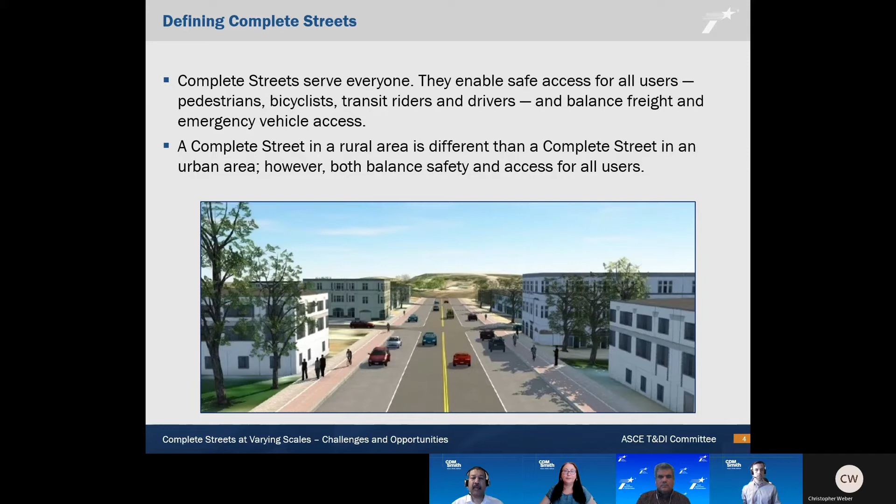Thank you, Ram. The Texas Department of Transportation, or TxDOT, is the transportation agency for the state of Texas. Headquartered in the state capital of Austin and with over 10,000 employees, the department is responsible for the planning, construction, maintenance, and operation of a multimodal transportation system.

Our state highway system has over 80,000 centerline miles, with a significant majority of those miles outside of cities. We have 25 district offices with oversight of 254 counties across Texas. Our mission: connecting you with Texas.

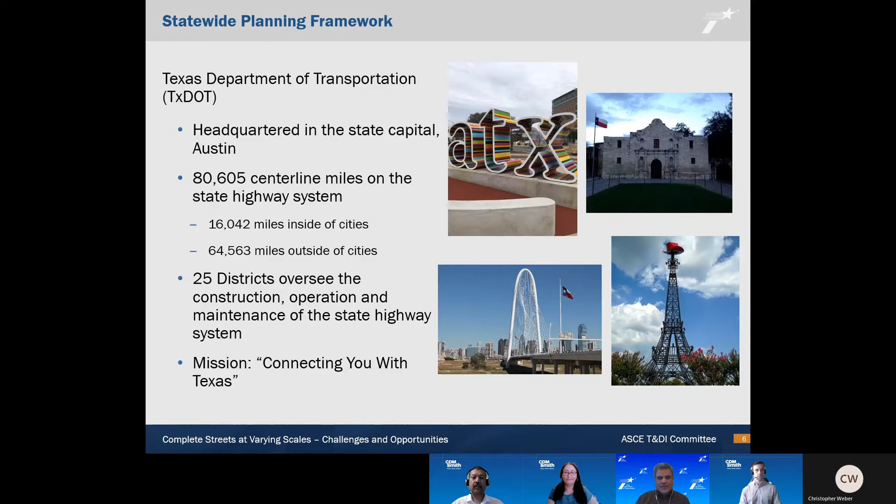Our bicycle and pedestrian program is located within our public transportation division and includes a manager and a planner. Each TxDOT district office also has a designated bicycle and pedestrian coordinator. In addition to TxDOT staff, the department has a bicycle and pedestrian advisory committee. It is comprised of 11 members appointed by the Texas Transportation Commission who serve voluntarily for a 3-year term. The advisory committee meets on a quarterly basis, with the next meeting planned for this summer in July.

The TxDOT Roadway Design Manual was developed by TxDOT to provide guidance in the geometric design of roadway facilities. The document is a guide containing geometric design recommendations and does not represent an absolute design requirement. Last summer, TxDOT issued a revision to the manual. The criteria contained in the manual are applicable to all classes of highways, from freeways to 2-lane roads. This roadway design manual represents a synthesis of current information and design practices related to highway design.

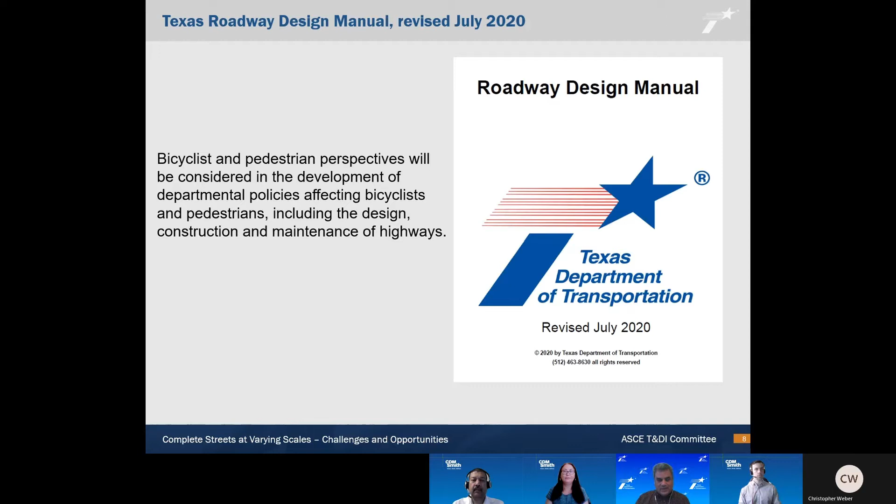Bicycle accommodations: the roadway design manual includes guidelines and standards for developing facilities to accommodate bicyclists. Such facilities are to be considered during the scoping process of a project and are a requirement for urban streets.

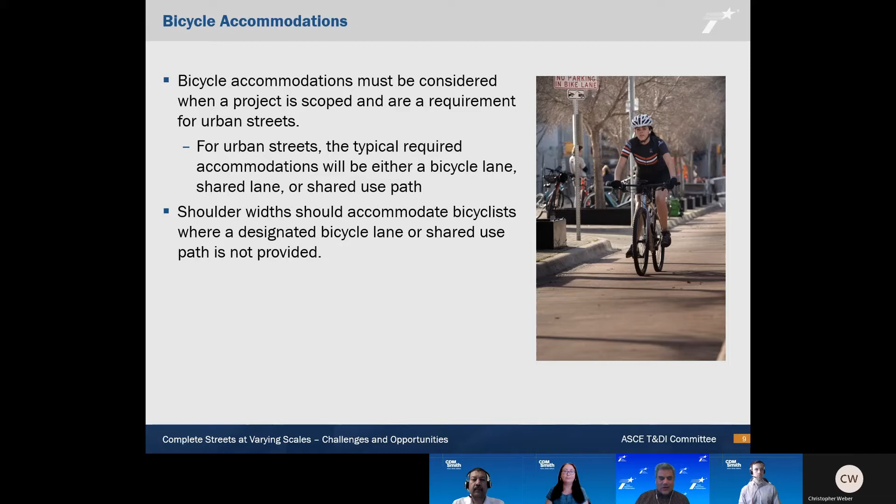The roadway design manual also includes guidelines and standards to accommodate pedestrians. Walking is an important transportation mode that needs to be incorporated into transportation planning and projects. Planning for pedestrian facilities should occur early and continuously throughout project development.

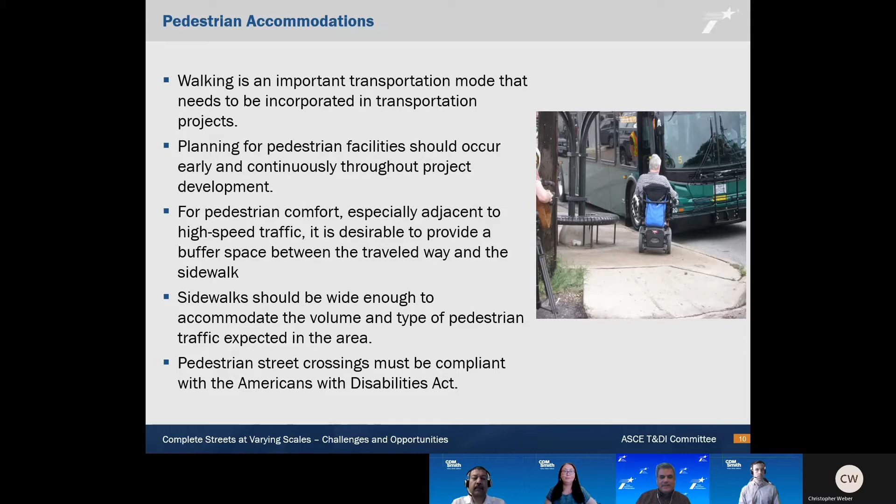Multimodal networks attract tourists, connect people to parks and other destinations, and create unique economic development opportunities in cities and towns across the state. In 2018, TxDOT completed the Bicycle Tourism Trail Study.

From that study, some recommendations were made related to being included on the bicycle tourism network, including: paved shoulders should be at least 8 feet wide and be provided on both sides of the roadway; drainage grates and gutter seams should not be included in the usable width unless they are bicycle friendly; and installing bicycle route signage to guide cyclists.

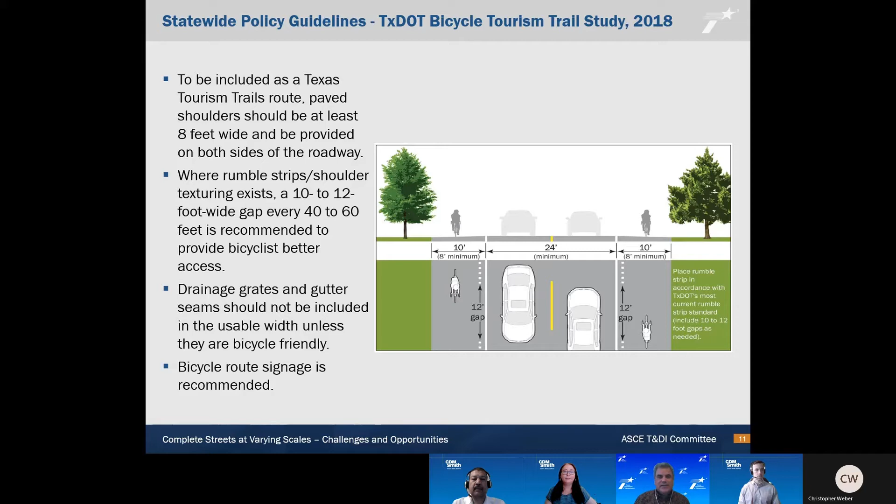Last year, TxDOT's Transportation Planning and Programming Division completed its most recent statewide transportation plan, Texas Transportation Plan 2050. The plan recognizes that active transportation, including walking and biking, encourages physical activity, which has been linked to a reduction in the risk of chronic disease and healthcare costs, and improving overall human health and quality of life.

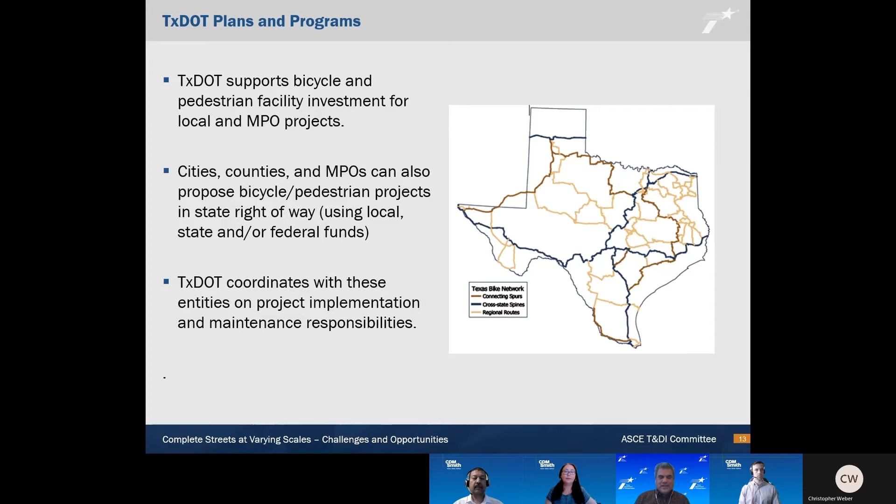TxDOT plans and programs: as noted in the Texas Transportation Plan 2050, TxDOT supports bicycle and pedestrian facility investment for local and metropolitan planning organization projects. Cities, counties, and MPOs can also propose bicycle and pedestrian projects in state right-of-way using local, state, and/or federal funds. TxDOT coordinates with these entities on project implementation and maintenance responsibilities.

TxDOT uses 3 federal funding sources for bicycle and pedestrian improvements: the Transportation Alternatives Program, Americans with Disabilities Act funding, and the Highway Safety Improvement Program. These programs are managed by the main TxDOT office headquartered in Austin in partnership with the 25 local district offices and regional and local governments.

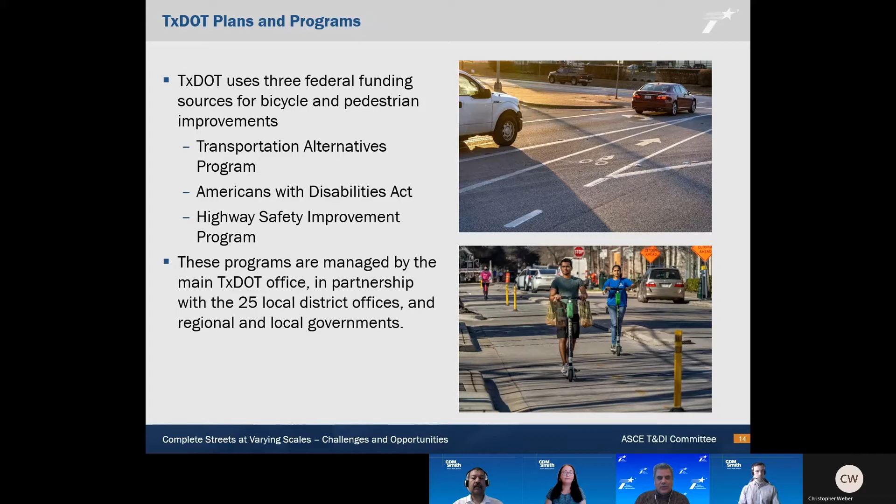Pedestrian and bicyclist traffic fatalities have been rising along with statewide vehicle miles traveled. November 7th, 2000 is the last time there was a deathless day on Texas roads. We want to end the streak of deaths on our roads. Our goal is to reduce the number of fatalities on our roads to zero by the year 2050. Continued investment in safe infrastructure also helps decrease motor vehicle related bicycle and pedestrian injuries and fatalities as we look to end the streak.

Thank you, Steve. So Steve provided an overview on the policies and programs at the statewide level. From that, we are going to delve a little bit more into a case study using US 67 in Texas as an implementation example. It is my pleasure to welcome and introduce Chris Weber, Alpine Area Engineer from TxDOT El Paso District. Chris?

Thank you, Ram. As Ram stated, we've recently completed a multi-year public engagement and planning effort on the US 67 corridor, which extends from the international border of Presidio, Texas and Ojinaga, Mexico, 142 miles all the way up to Interstate 10 near Fort Stockton.

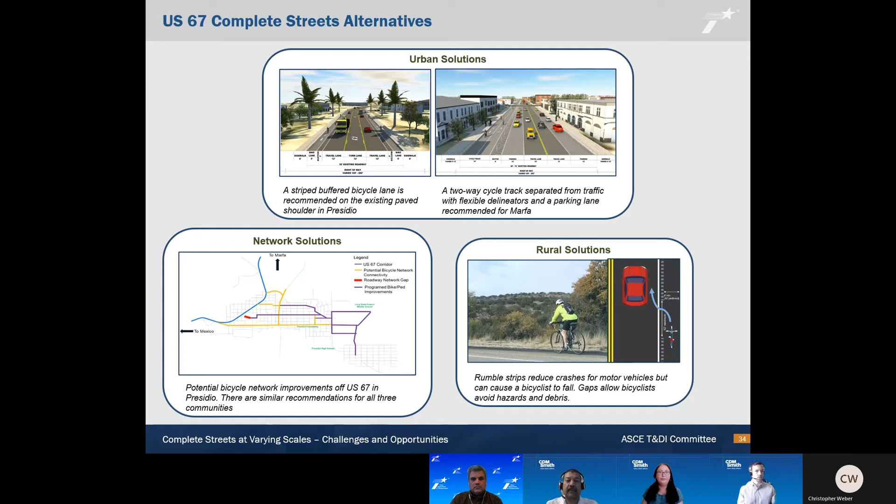So in taking all this information we collected from the public, our data analysis, and best practices from across the country, we developed a toolkit of different complete street solutions for the US 67 Corridor Master Plan. This toolkit essentially breaks down into urban solutions, rural solutions, and network solutions. I'll take you through a couple examples more closely in the next couple slides.

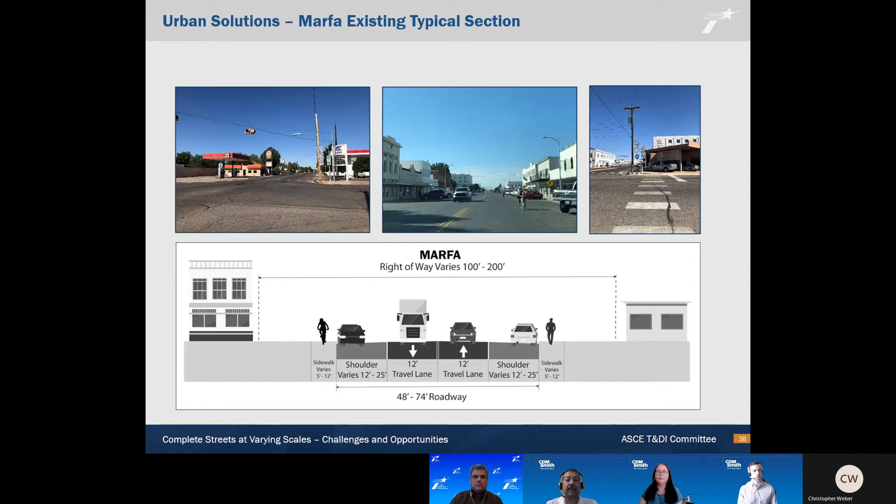As an example of one of our recommended urban solutions, I'll show you the city of Marfa, and this is the existing corridor. Residents in Marfa especially expressed a desire for bicycle and pedestrian facilities throughout the public outreach process. The city currently lacks bicycle lanes, but does have a local bike share called Bike Marfa. There's also significant tourism, especially present in Marfa for art attractions, and pedestrians and cyclists are a common sight on the roads going between the different attractions. As shown on screen, the right-of-way is pretty wide, with a lot of space to potentially work with for enhancements to accommodate bicycle riders and pedestrians.

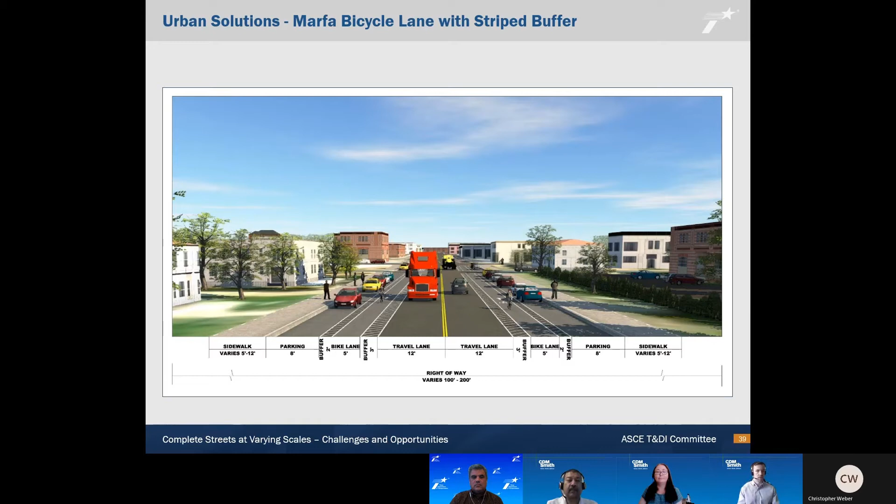On screen here is one of our proposed urban solutions for Marfa from our toolkit. Working within the wide right-of-way, the solution includes a bicycle lane with striped buffers, a parking lane, and a sidewalk. This next slide shows a plan view of the same solution. As US 67 is a corridor that carries a high volume of freight vehicles, this view shows the separation and mixing of the modes at this key intersection. As you can see, we have the sidewalks, the bicycle lanes with the buffers, and the striping for the vehicles and freight vehicles.

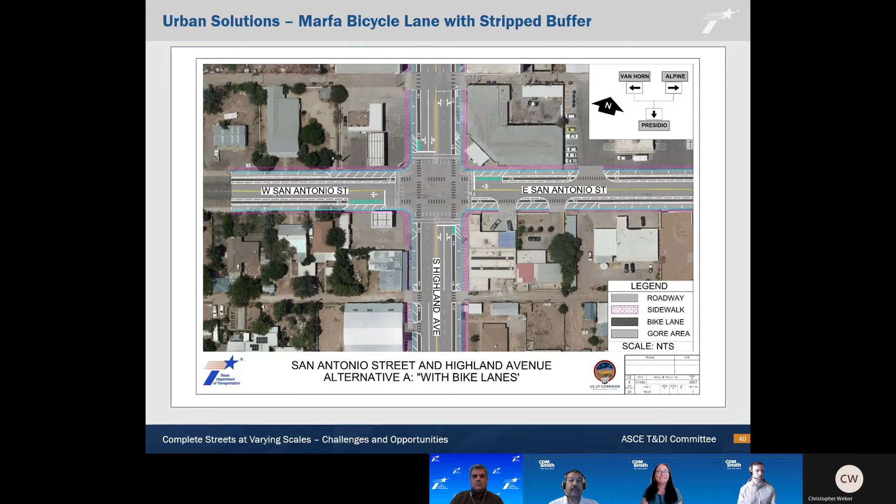To develop network solutions, we wanted to understand where current demand for bicycle and pedestrian amenities existed. So without having bicycle counts for these communities, we turned to Strava. Strava data is crowdsourced data collected from users of the Strava smartphone app. Users can utilize the app to track cycle trips, walks, and even jogs. Strava data is a useful tool for us to help identify when bicycle trips are occurring or demanded, but where that safe infrastructure might be lacking. So through our analysis of Strava data, we identified some key network links where users would benefit from safer bicycle facilities, as shown in the map.

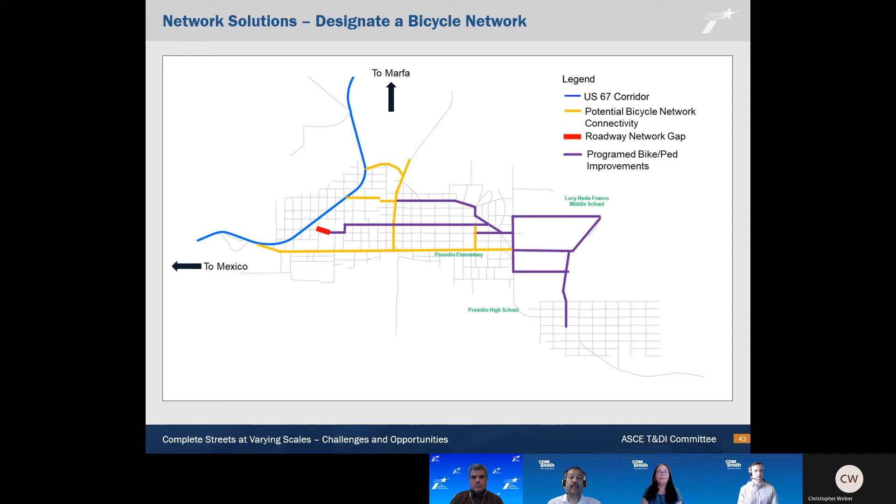On this slide, we show what we developed as a general cross-section within the city of Presidio as a network solution, something that could fit on most network links throughout the city. So we're showing the addition of a bicycle lane with a buffer.

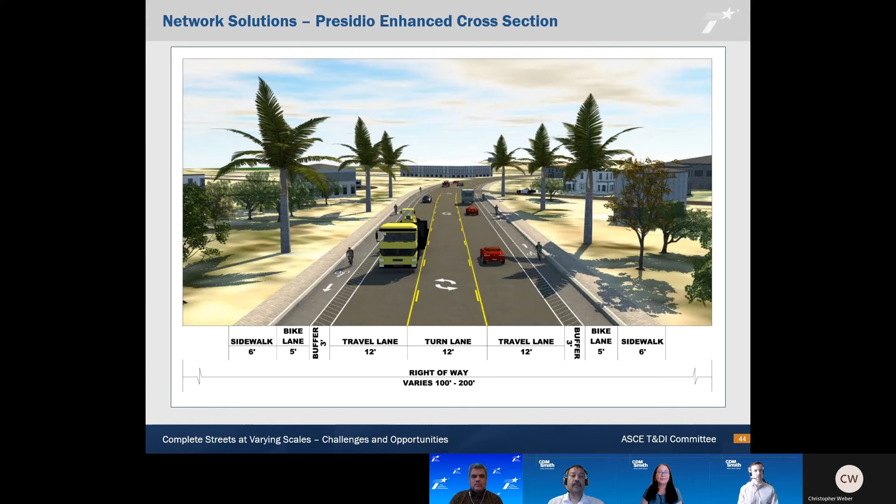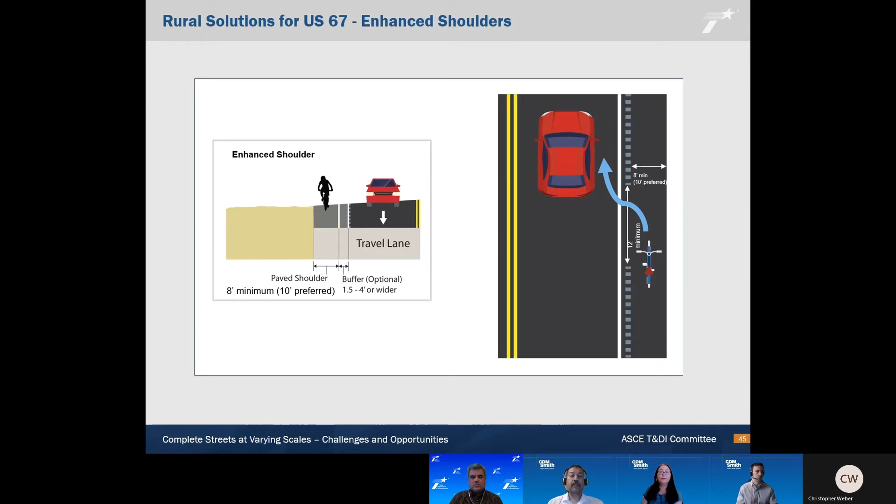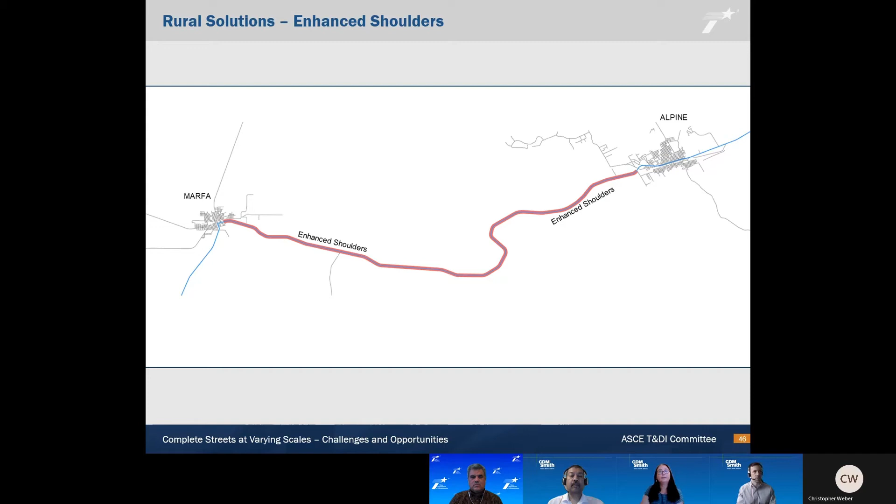To wrap up on the case study of the US 67 Corridor Master Plan, the plan was developed to meet the unique needs of a rural corridor out in West Texas. Through our public engagement activities, significant public feedback and demand was learned for complete streets. As a result, we developed complete street solutions to meet these public demands for bicycle and pedestrian needs, while also balancing the needs for freight travel. TxDOT maintains guidelines and standards for bicycle and pedestrian facilities within rural contexts, and those were used to develop our solutions for the corridor. Our complete street solutions were developed for these corridor communities of Alpine, Marfa, and Presidio to provide a toolkit for future plans and future implementation opportunities.

Thank you, Robbie. We have provided an example of a case study of US 67 and how complete streets are applicable in Texas. Now we are going to step outside of Texas and take a nationwide perspective on complete streets, with case studies being presented and discussed in other parts of the country. Let me welcome Jennifer Palmer, my colleague and senior project manager, to provide an overview of the national perspectives. Thanks, Ram. I think as we go through these national perspectives, you'll see some mirroring of the great practices that were employed on US 67 and that really make a difference in successfully implementing complete street solutions. Developing complete street solutions requires a tailored approach to the context of the roadways and the surrounding land uses that you're dealing with.

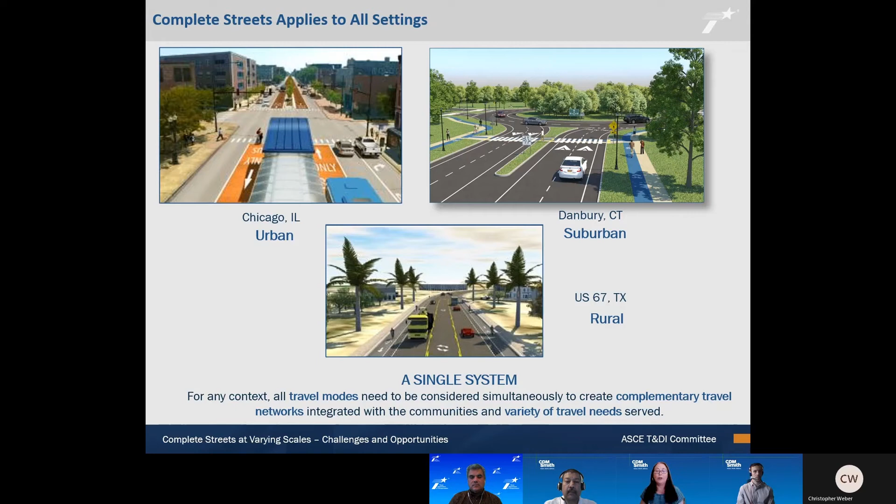It needs to start from early planning levels to be truly effective, and I think we saw that exact thing with US 67. Only looking at complete streets in the context of a design process misses significant opportunities to improve the built environment in a way that develops a sense of place and can help serve people rather than any one particular mode.

Effective integration of planning and engineering is needed for successful implementation of these kinds of solutions. And there are three major elements that help us set up a project for success that we'll be briefly going over today from the national perspective, incorporating these best practices and experiences across the nation.

These involve analysis at what we'll call a program level at the very start, integrating land use and transportation goals and objectives, both existing and future focused, to develop a defensible and performance-based criteria for solution generation.

At the project level, the analysis and data help define community assets and connection needs, including examining potential for latent demands that can be helped to develop tailored block-by-block solutions, and that consider innovative solutions that may require time and education of stakeholders for buy-in, as well as identifying the low-hanging fruit like we saw with US 67 and Chris's presentation.

And then finally, for all the technical analysis that you do, it's really important to bring in the stakeholder and community buy-in. We saw in US 67 a variety of tools were used to be able to solicit that input from the public and stakeholders early on.

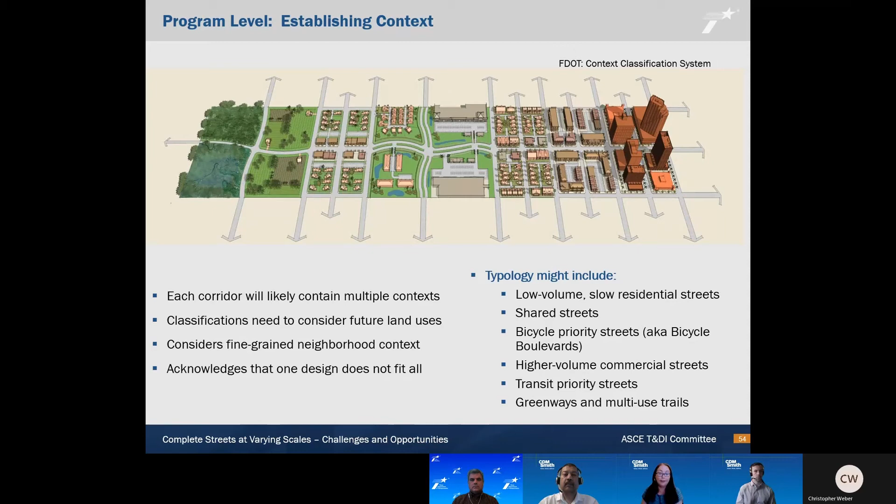These context classifications, or land use typologies as they're often called, once established, can then be used to set appropriate desired functional characteristics within the corridor and design parameters that guide solution building at later stages of project development. This helps establish at the outset design speeds and functionality considerations that are needed, as well as an array of needs based on desires within the community and from the community input that's gathered.

So what do we do once we've established that land use typology or context classification? There are a number of ways to further examine the needs at a project level, but thinking programmatically at the start can help to define performance-based goals and objectives for all modes.

There will ultimately be trade-offs between these modes down the road in developing appropriate solutions within available right-of-way, but this programming analysis really helps to establish the desired and needed system for each mode, so that solutions can be tailored to meet a variety of user needs from the very start of a project.

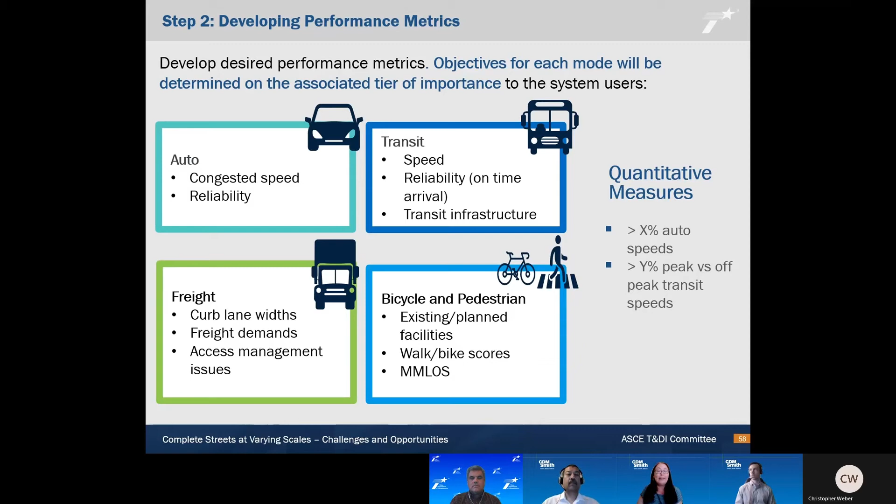Based on that tiered system, we can then develop desired performance metrics and benchmarks for each mode. These performance-based criteria should be as quantitative as possible within each mode, because it allows you to get into the heart of trade-offs between priorities that may need to exist when considering comprehensive solutions.

This is where the third step comes into play, where you establish existing and future conditions for each mode based on the alternatives developed, and evaluate those quantitatively between modes. Having quantitative performance measures for both automobile and transit movements allows you to look comparatively at the changes in each mode and weigh pros and cons of solutions.

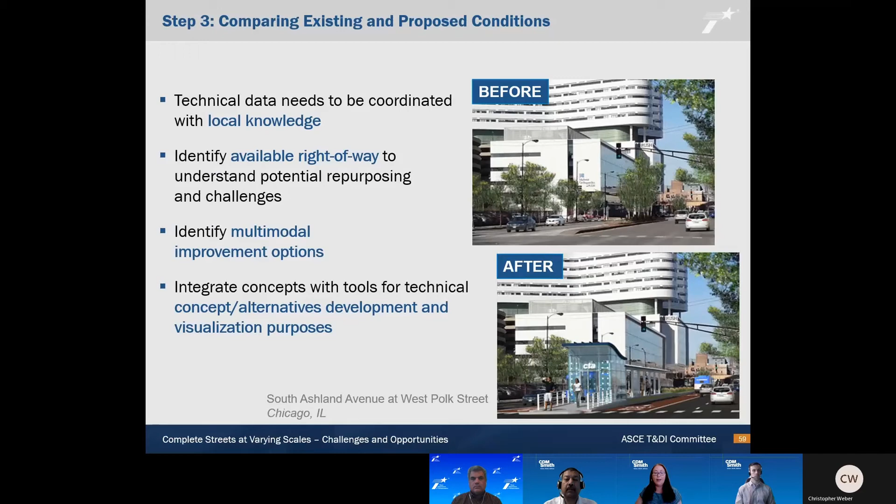So if you're considering converting a general purpose lane to a dedicated transit lane, you can start to understand the changes expected in both transit and automobile performance. We did this evaluating transportation impacts in Seattle, where we found that dedicating a portion of the corridor to transit lanes would improve transit speed and reliability by a very high, quantifiable percentage, while resulting in only 1 to 2 minutes of additional delay to general automobile traffic. While not an apples-to-apples measure, this allows for a broader perspective, comparing the values of different alternatives and modes when evaluating potential solutions.

As we think about the overall process of a project from planning to design and construction, the programming steps outlined help establish an appropriate performance-based baseline for further detailed planning within a project and to develop a series of alternatives that can be vetted.

That's where project level detailed analysis comes in. What we want to avoid in projects like these complete streets is late-stage comments from stakeholders and community members about alternatives that may not have been vetted. We also want to establish a sound basis for choosing a preferred corridor plan in case you meet opposition along the way. Final design just isn't the place to backtrack and reconsider decision-making processes.

So what does that detailed examination at the project level entail? First, it means looking at a corridor in terms of its assets to the people and destinations it serves. That can mean identifying key travel markets and major activity generators, but it also involves examining the differing communities being served, their culture, history, and context, which may feed into development of viable solutions to connect people, as well as the amenities that may need to be provided.

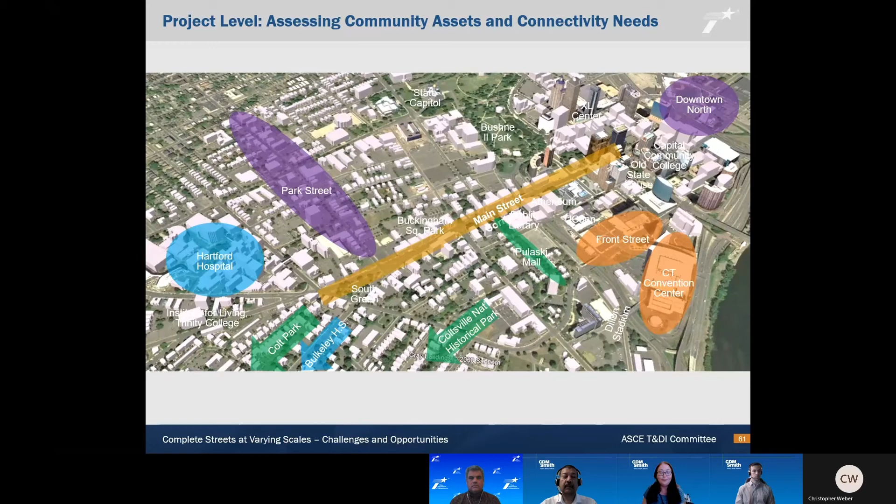Beyond this, safety becomes paramount to each and every project and must be considered both programmatically at a system-wide network level, and at the project level, to focus on locations where complete streets designs may have the greatest benefit to the users of the system and help support Vision Zero goals.

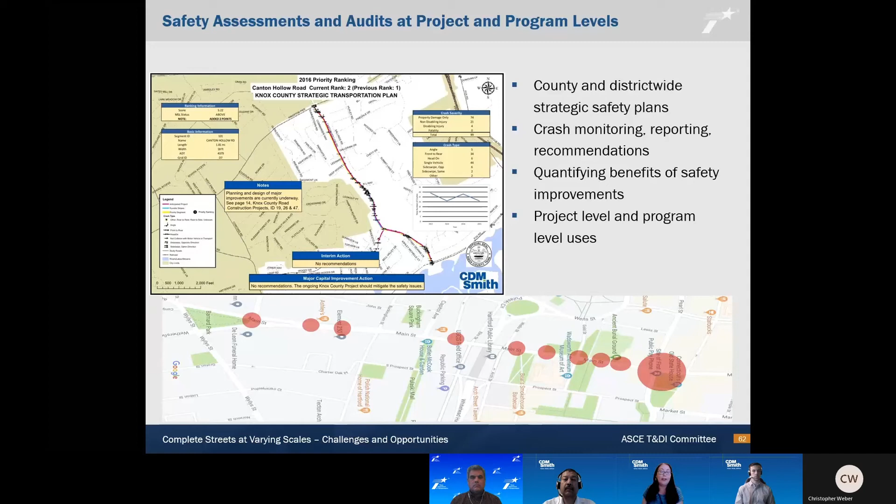Crash analysis helps inform where problems exist and potential ways to address them. In comprehensive safety analysis and audits, you can also use tools like benefit-cost analysis to help prioritize improvements with the biggest bang for their buck. This doesn't mean all identified safety improvements aren't worthwhile and needed, but it recognizes that cost and funding are always an issue in projects, and that you may need short-term, mid-term, and long-term investments to fully address the array of safety and other issues in a corridor, with the reality of costs in mind.

Additional analysis at the project level often includes, and this is just one example of a recent project that we did in the Boston area. It looked at additional analysis for bike ped orientation, establishing an index for the corridor, the major street network, and the major intersections, identifying and defining gaps in the network for all users. This gets at some of the things Robbie was talking about with the Strava data used for US 67, but can be done through other origin destination and count data that you may be able to obtain. And then further examining the ways that we can address latent demands in a corridor.

So for the bike ped orientation index, in particular, analysis there factors in multiple criteria for each intersection, identifies bike and ped safety deficiencies and safety data, and establishes a scoring system on compatibility of the street and nearby intersections to accommodate bike ped travel.

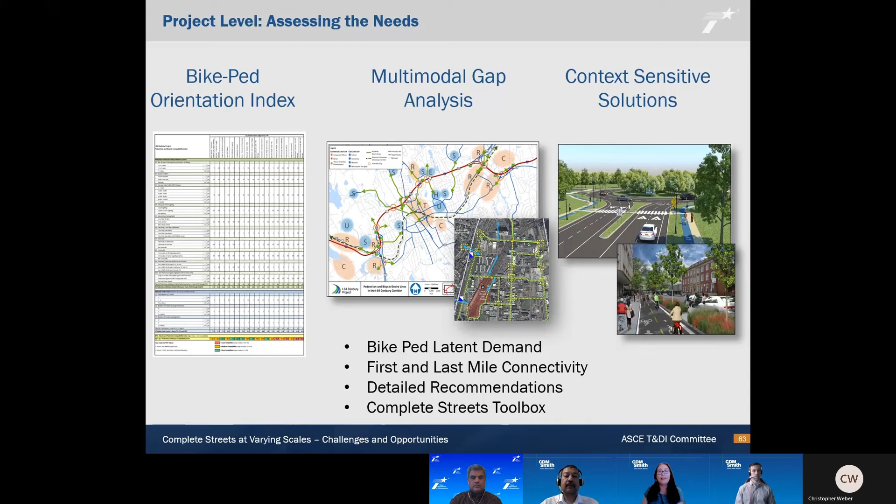And this scoring, along with other bike ped origin destination assessments, helps to establish desire lines for connections and define the travel gaps. This is just one example of the I-84 corridor that we're showing for the multimodal gap analysis that was done in Connecticut.

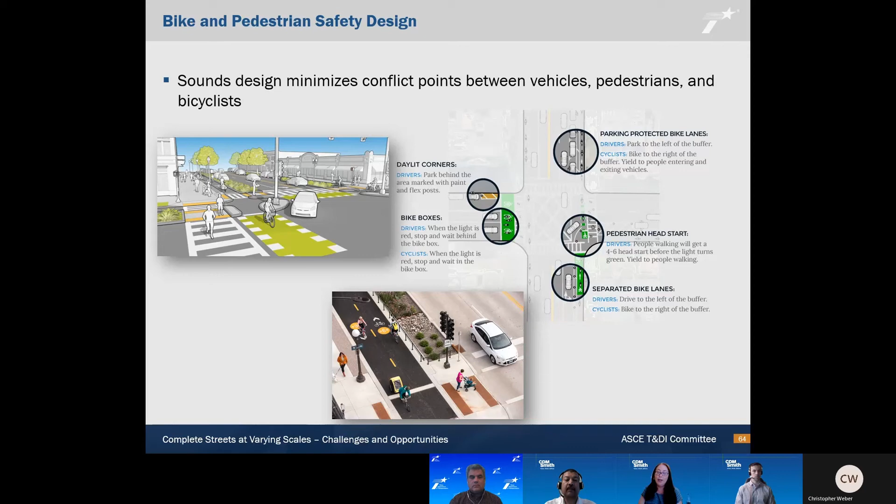So sound design minimizes conflict points between vehicles, pedestrians, and cyclists. And treatments may need to be considered to sufficiently address these conflict points. At intersections in particular, this is probably the most important, and is often a key location where crashes are located and where solutions need to be developed in a tailored way to address these conflict points.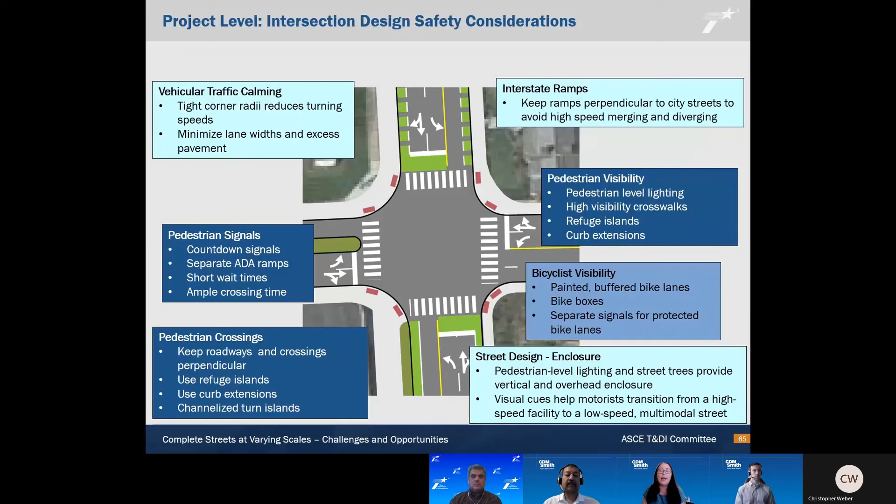So an array of solutions help to address these issues at intersections. Best practices involve an array of considerations for safe access of all users of the roadway. This can include considerations where vehicular traffic calming may be needed to reduce turning speeds of cars, evaluating and developing bike and ped signal systems that provide short waiting times and sufficient crossing times, and recognize ADA challenges. Consideration at ped crossings to keep roadways and crossings perpendicular. This really helps with the cone of vision and safety issues in their local environments, and helps to fully consider a wide range of potential solutions.

So an array of solutions that you develop at this point in the planning process really allows you to start to consider some innovative, out-of-the-box alternative intersection improvements. And these can be more fully developed and evaluated during the planning stage. This is the stage in the process where you can really look at significant changes to an intersection configuration and really reimagine what's possible.

So FHWA has resources for many of these innovative treatments. Many departments of transportation across the nation have developed similar guidebooks on acceptable alternative intersection concepts that work, and when they work, their pros and cons. This is just one example of a town center intersection, or TCI, and really gets to the idea of being able to provide space for some of these complete streets activities and the placemaking that goes along with them.

Below, you can see an example from Denver, Colorado, where this was employed close to a streetscape mall kind of area. So there are certain circumstances where this works and certain disadvantages of this in other contexts. Really considering this array of solutions early on in the process is needed to see what fits within the context of your corridor.

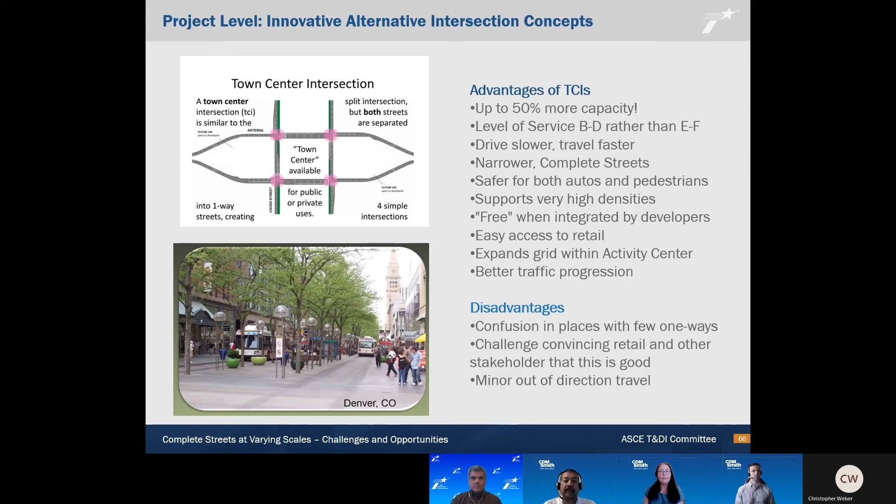So more complex intersections, like this one that we show from Seattle, emphasize the need for block by block solutions to be considered rather than just overall programmatic solutions. In this example, the community was a strong bike-oriented community, and new dedicated transit lanes were also being proposed. As you can see, this is a pretty difficult intersection to navigate for automobiles and other users of the system. So safe design that would help to minimize conflict points here were particularly challenging.

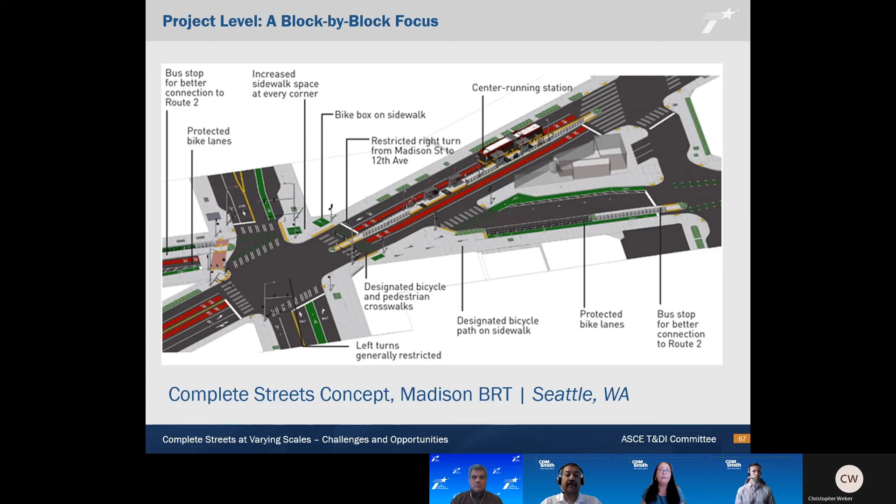But working at the block level helped to establish some really innovative solutions, like converting a previous one-way that had very low traffic volumes to a dedicated bike boulevard, while enhancing safe travel for all modes at this very complicated intersection, and making sure that we were reducing those conflict points and providing enough space in between.

In addition to these types of roadway and intersection designs and overhauls that you can consider during the planning process, there are a variation of differing traffic calming measures that may be considered at the block by block level. This could include creating bulb outs, mid-block crossings, pedestrian refuges, and establishing gateways, which we found to be very effective in multiple context classes, helping to naturally cue traffic to calm and act at slower speeds. When you look at a corridor that goes through urban and rural classifications, those gateways become really important in letting people know that they're entering a different circumstance.

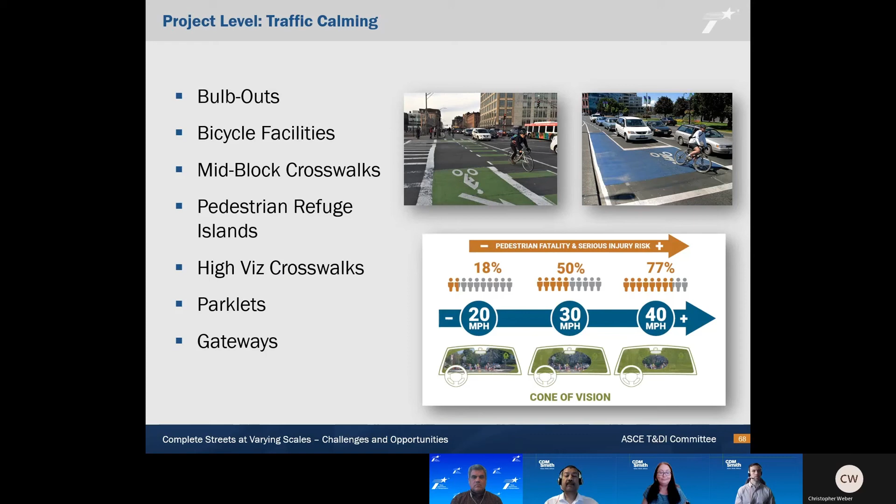Travel demand management considerations should also be considered and fully vetted at this stage of the planning process, so that you can accommodate a variety of uses and current as well as emerging technologies. This occurs at many different levels, including working with the private sector to accommodate improvements, public-private partnerships, and public sector solutions. Comprehensive TDM solutions can not only help a corridor accommodate all users, but help leverage investments and build partnerships with unique entities. We see this a lot in new services like mobility as a service solutions, providing for TNCs like Uber and Lyft, and in making bike share programs and integrating those with parking management systems.

In addition to some of these innovative and more out-of-the-box treatments, it's important at a project level to also understand the low-hanging fruit. That is the opportunities for more incremental and cost-effective solutions that help to get early wins for a project and really build momentum for future improvements. We saw this in US 67, and it's certainly a best practice across the nation as well.

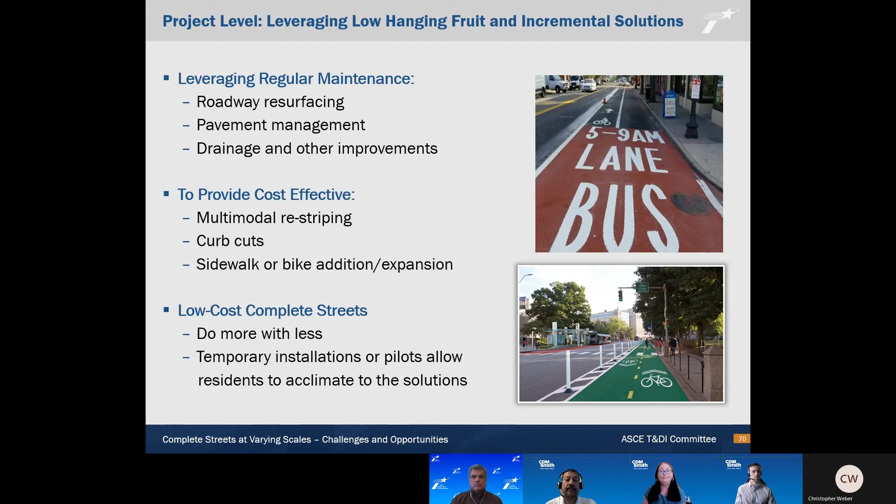To do all of this, though, you really need sound analysis and the tools that help tell the story of the improvements being proposed. This really helps justify decision making, particularly when looking at out-of-the-box and innovative solutions. It can help educate and bring on board agency stakeholders who may be reluctant to change. Both traditional traffic analysis and multimodal analysis, like micro simulation, help allay concerns that may be raised and are important for educating decision makers on how improvements will actually feasibly work.

One of the tools we've used across the country, which I think Robbie even mentioned, was InfraWorks, which allows you to model out alternative conceptual engineering in a way that can be visualized in 3D but has interoperability with CAD programs. This allows you to show less technically minded stakeholders the pros and cons of proposed solutions, and to make modifications to design plans rather quickly to address input, then show them those changes in a 3D environment.

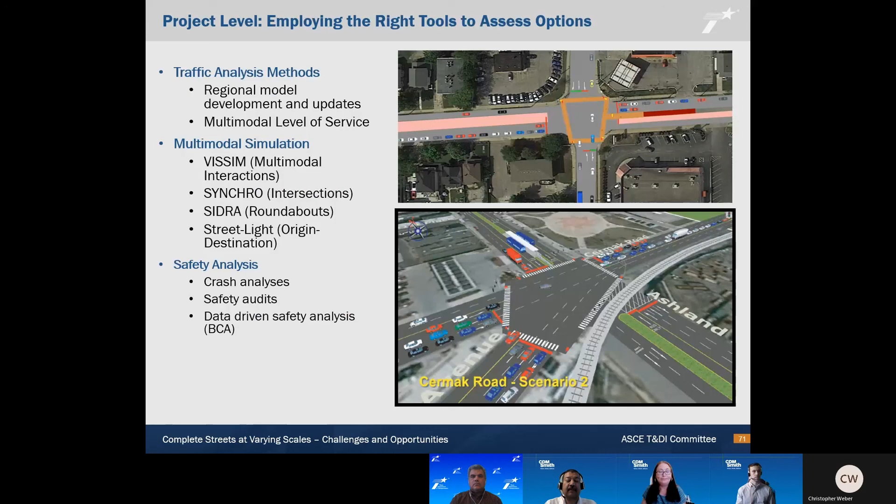But all of this technical analysis and these program and project level stages are only as good as the community buy-in that's established. US 67 showed several innovative ways this was done, and I want to go over one example that may be of particular use in developing consensus on complete streets design issues.

We all know as planners and engineers that many of the solutions we develop need to adhere to the reality of limited right-of-way and the cost of that, or just an inability to expand right-of-way due to a variety of circumstances.

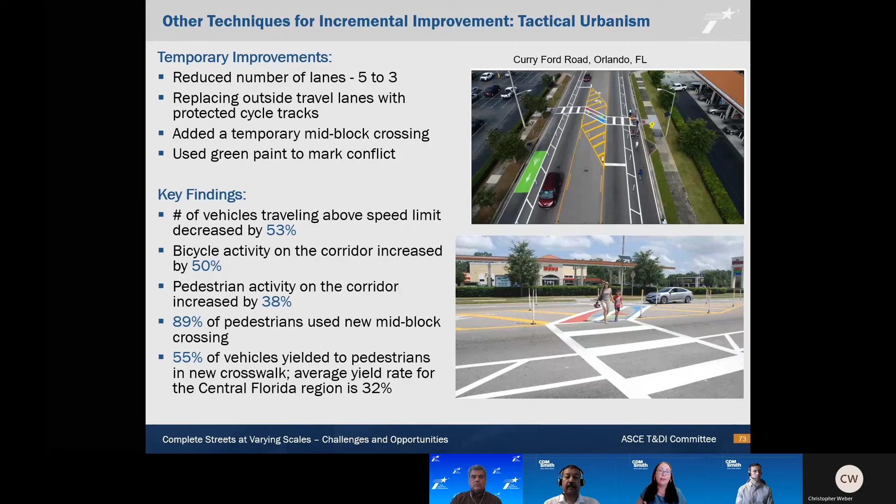In closing, I'll just say that integration is really key. The time of thinking about design as a separate process away from the planning process, or only doing a high-level sketch at the planning level, just isn't sufficient to develop successful implementable solutions at this level.

When you integrate the planning and design process in the ways we talked about here, you help reduce design variances that may be needed later. You reduce the schedule delays that may occur to a project in getting it up and running.

And you take the real process into consideration early on, to look at opportunities and alternatives, and to not miss opportunities because they're only identified at late stages. Throughout this entire process, you're building consensus that really aids in establishing buy-in for technical decision making.

And with that, I'll turn it back over to Ram.

Thank you, Jennifer. So through this presentation, we looked at the statewide scale. Steve talked about complete streets from a policy and procedures standpoint from a statewide perspective. Chris and Robbie talked about complete streets using a case study, looking at the implementation at the local scale, as well as the recommendations that came out. And then Jennifer talked about the national best practices and some excellent case studies where complete streets have been planned and used.